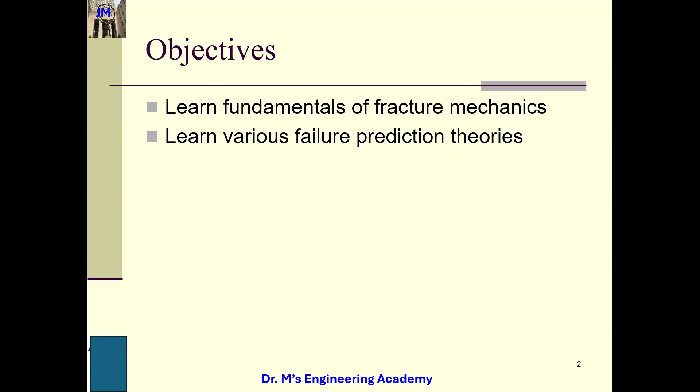So, introduction to fracture mechanics. Fracture mechanics is a very important branch of mechanics, and we are going to talk about it first because these are the fundamentals. We focus on linear elastic fracture mechanics, which analyzes crack growth during service. We're going to focus on LEFM, linear elastic fracture mechanics. That's the basics. We also have elastoplastic fracture mechanics, which is upper level.

LEFM assumes cracks can exist before service begins - for example, existing flaws in the structure, second phase inclusions, or defects - and attempts to model and predict the growth of cracks. We can predict under what conditions a crack initiates, and also under what conditions a crack propagates.

So the stress concentration approach is inadequate. What is stress concentration? We know this, right? Stress concentration means that if we have some defects, flaws, or cracks, at the edge of the cracks the stress will be much higher than the stress level of other areas. You still remember stress concentration?

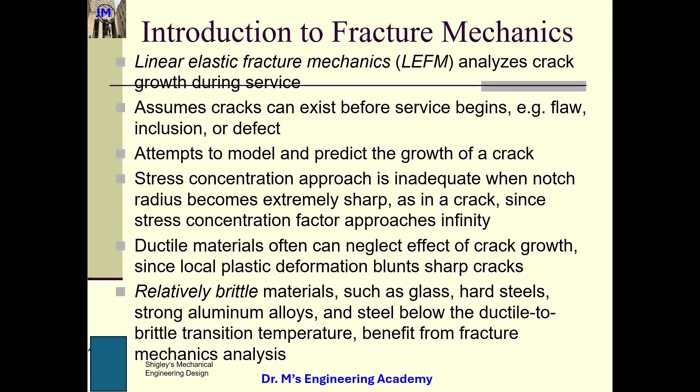So, quasi-static fracture. Though brittle fracture seems instantaneous, it actually takes time to feed the crack energy from the stress field and propagate the crack. So a static crack may be stable and not propagate. At some level of loading, it can render a crack unstable, causing it to propagate and fracture. So sometimes under certain loading conditions we can have a crack that is stable and will not propagate. However, if we change the loading condition, this crack can go all the way down until the material fully fractures.

So I told you guys, fracture cracking is a very effective way for the system to release energy. I told you, right? Whenever the energy is too much for the system, the most vulnerable points will have fracture, because there is a tendency for all systems to want to reach the minimum level of energy, to reach a state of equilibrium.

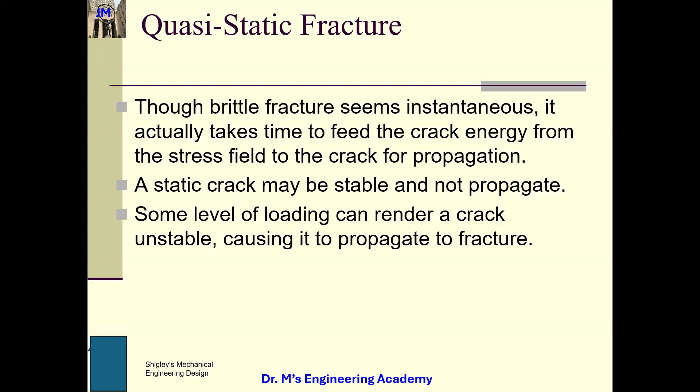So this is quasi-static fracture. What is quasi-static? We have learned static, right? And dynamic. What is quasi-static? Quasi-static means that the loading condition changes slowly, such that for all this time, a state of equilibrium can be reached.

Can you write this down? Quasi-static means that the loading condition is changing - it's not static anymore. The loading condition is changing, but it changes slowly, such that for each of these steps I can treat it as static. That means for each of these steps, equilibrium is reached. Right now guys, this is what quasi-static means.

So fracture mechanics. This was established by this genius Griffith in 1921, which is 100 years ago.

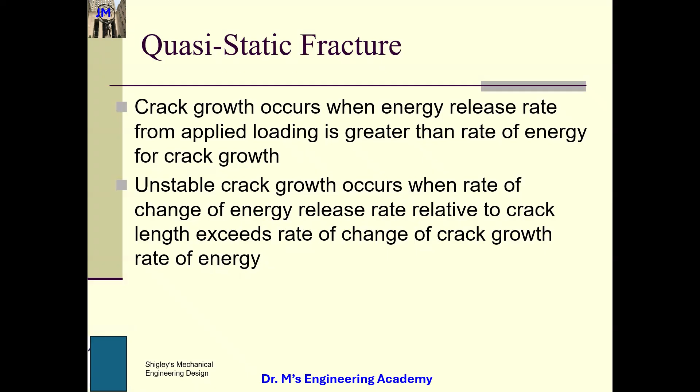And then we talk about the three modes of fracture. In the manufacturing processes class, I taught this one a little bit. So for fracture we have three modes.

The first one is opening, that's like an alligator's mouth opening. The second one is sliding - just think about when you drive your car on sand. If the traction is not big enough, the car tires are going to slide along the sand. So this is called sliding.

And the third one is tearing, which is out of the screen plane, going out. So these are the three different modes. The first mode is the most important one - it's the most commonly seen phenomenon.

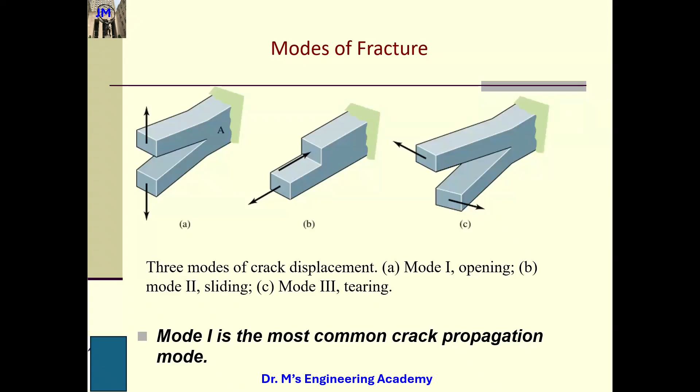Sigma x, sigma y, tau xy, and sigma z are different for this 2D case scenario. So sigma x, sigma y, and tau xy are related to the stress level you apply, and also the direction - you can see sigma theta, along with the crack length. So the sigma components are functions of the stress level, crack length, along with the location of the point of interest.

And regarding sigma z, we have 2 case scenarios. Plane stress means the plate is very, very thin, and plane strain means the plate is thick. So these are the equations.

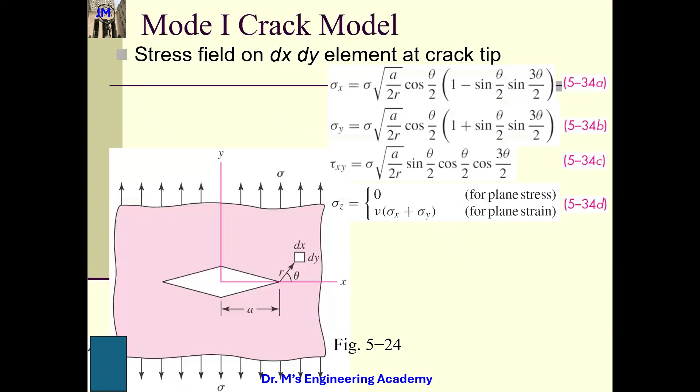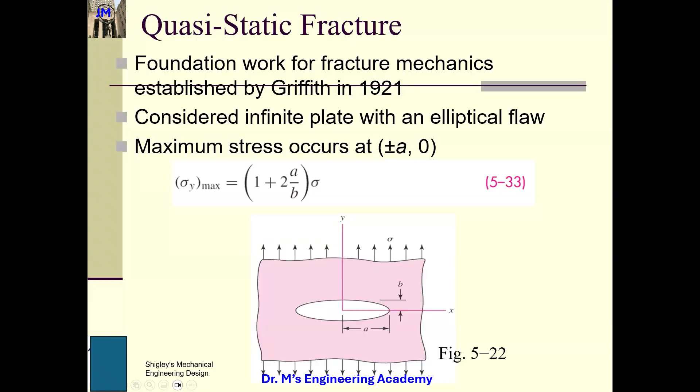However, for cracks, we have a stress intensity factor. So there are 2 different concepts. I might ask you in the exam to use your own language to tell me the difference between these two. Stress concentration factor is for a bigger hole, and stress intensity factor is for cracks. Specifically, stress intensity factor is for fracture mechanics.

Right now, stress intensity factor is for fracture mechanics. Stress concentration factor, which we call Kt, is for a bigger hole. Stress intensity factor, I specify as the stress intensity at the crack, K. This unit is very, very weird - if we use international units, megapascal square root meter. So Ki equals beta sigma nominal.

Sigma nominal is the load you apply, equals multiplied by square root pi times A - pi is a constant, A is the crack length. Can you write down this?

Write down, A is the crack length. The crack length is very, very interesting. If this is an edge crack, if this is an edge crack,

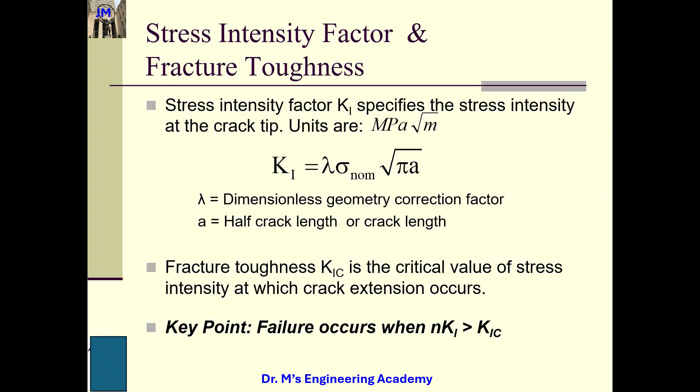So there is a geometry factor, the dimensionless geometry factor. It is dependent upon loading conditions and also dependent upon the geometry - geometry means how big is the crack and the geometry of your structure, you can see.

So for tension, I have tension. If this is width, so this is the central crack, this is thickness. So dependent upon the ratio of A to W, the lambda changes slightly, even though it's not very big, slightly. Be careful, okay? That means which lambda you should choose - you need to take a look at the geometry, and then come back to use this table to get the corresponding lambda. Once again, this is an empirical one.

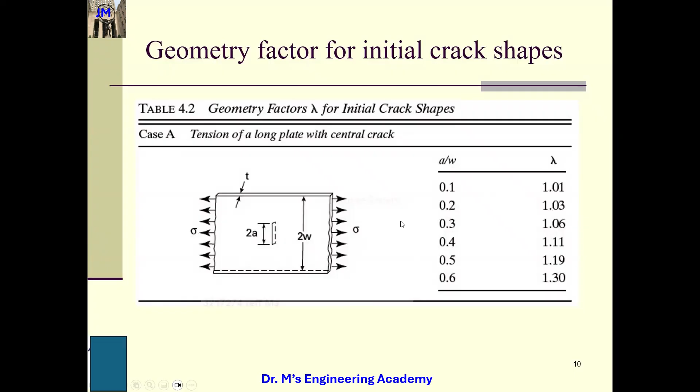Questions for these two slides?

Depending upon the crack size, the geometry of your material, the geometry of the structure, and also where the crack is—whether it's edge, central, or non-central, non-edge. So here, this is a non-central, non-edge crack. You can see this is not an edge, and also not central. This is off-central. We call it an off-central crack.

Longitudinal tension: solid curves are for crack tip A, and the dotted dashed curves are for crack tip B, because A and B are not symmetric anymore. Based on different tips, you are supposed to use different curves to get this number. The reason is that A and B are not symmetric about the centerline. How tough it is for A and how tough it is for B will be different, right?

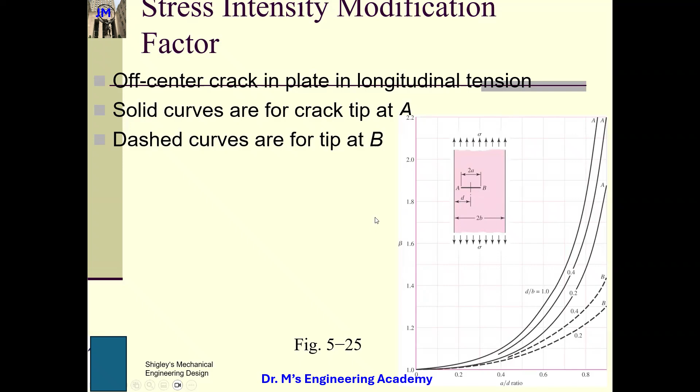This cylinder is loaded in axial tensile, having a radial crack of depth A extending completely around the circumference—a crack uniformly distributed along the cylinder.

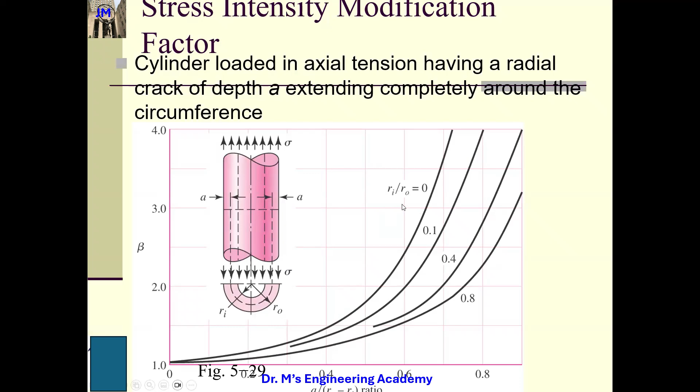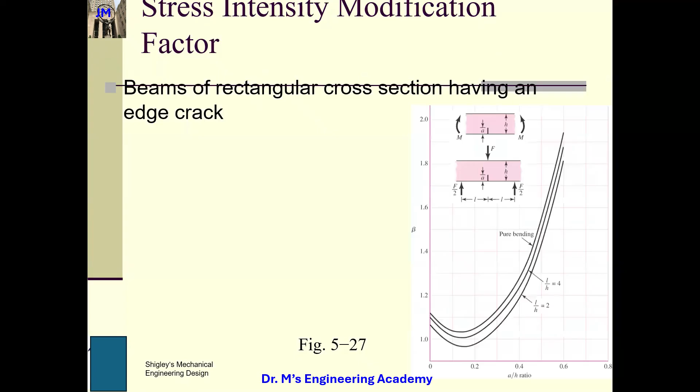So you have the lambda value, we can put beta—sorry guys, but this beta and lambda are the same thing, I forgot to tell you. These figures use beta, but here I'm using lambda; they are the same thing. Keep in mind, beta and lambda are the same because different authors use different notation—they both refer to the dimensionless geometry correction factor.

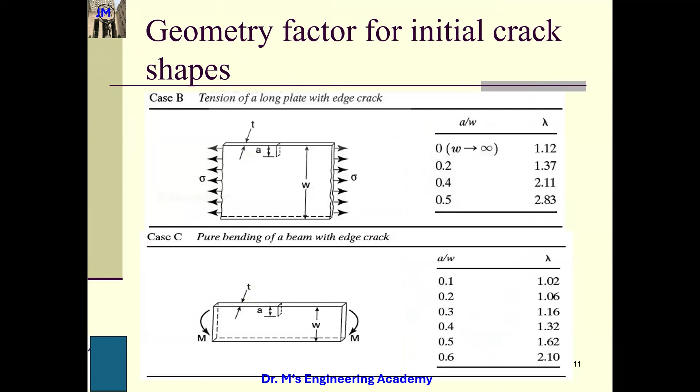This is a cylinder under internal pressure, having a radial crack in the longitudinal direction of depth A. Based on the ratio Ri and Ro, you have different beta.

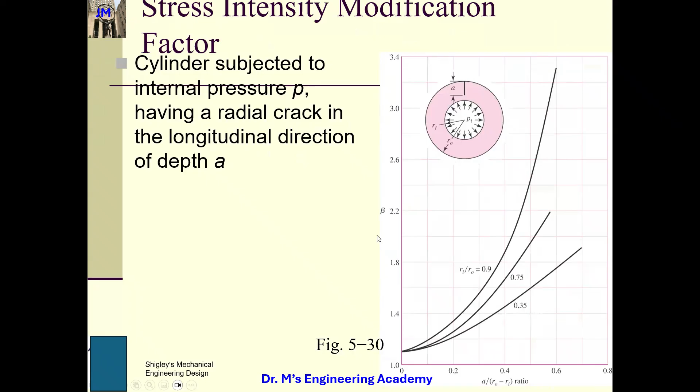Now, yield strength and fracture toughness. Fracture toughness is the indicator of how difficult it is to fracture a material—that means the ductility. The strength and the fracture toughness are always inversely related: high strength and low fracture toughness, or low strength and high fracture toughness. Fracture toughness is another indicator of ductility.

The stronger your material is, the lower the fracture toughness.

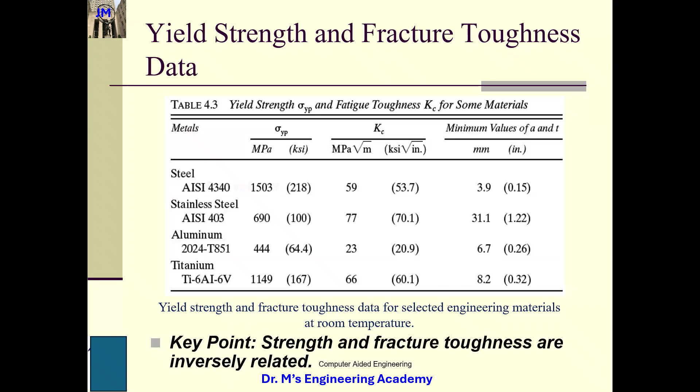These are factors affecting KIC, the material parameter: strain rate—if you increase the strain rate, KIC decreases. Temperature—if you lower the temperature, KIC decreases. Yield strength increases, KIC decreases, because they are inversely related. And KIC increases with ductility; KIC and ductility are talking about the same thing.

You select a material with a high KIC. Keep in mind, if it has a high KIC, that relates to strength, and you need to consider the strength as well.

Questions so far? No questions yet? You can understand fracture mechanics very well—you're very, very smart, much smarter than I was.

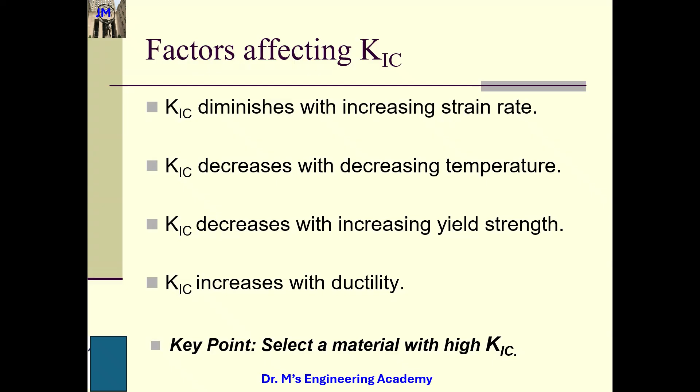Okay, then we talk about this equation and how to predict failure. We use two commonly used equations: one is called MSST, and one is called DET. MSST is also referred to as the Tresca criteria.

And the DET refers to von Mises criteria. Von Mises and Tresca, they are two genii, so they have developed this one for us.

You can see for the MSST, pay attention to what I say. This problem will appear in our exam. MSST uses sigma 1 and sigma 3, that is the highest principal stress minus the lowest principal stress. If the difference between these two is equal to the yield strength divided by NS, that's a critical point. So if this equation holds, you need to be very, very careful.

So the second one, the DET, uses sigma 1, sigma 2, sigma 3, the three principal stress values. Some students ask, what if we do not have the principal stress at the very beginning? Then for any common stress values, you should use this equation with sigma x, sigma y, sigma z, and tau xy, tau yz, tau zx.

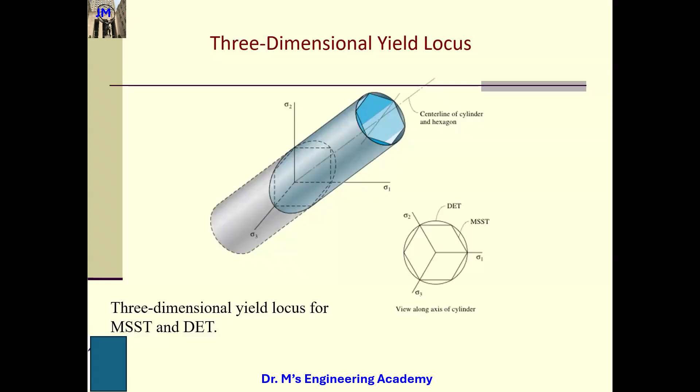Then for the MSST, how to solve the problem using MSST - this is for DET. For MSST, we use sigma 1 and sigma 3.

Do you guys still remember how I told you to draw the Mohr circle? I draw a Mohr circle, talking about 2D now. Draw a Mohr circle, the center, this is O, and this is C. OC equals half of sigma x plus sigma y.

You guys still remember? Then I have this point, I select the point - this point is sigma x and minus tau xy. Without loss of generality, I just put this point. You still remember, guys? Because I'm going to ask you to use Mohr circles, use MSST to solve the problem. So here, this is my radius.

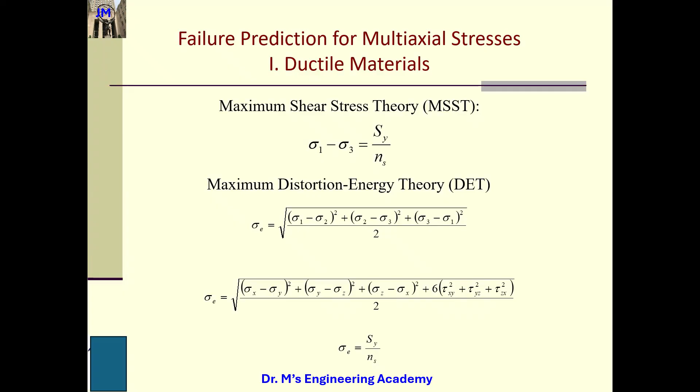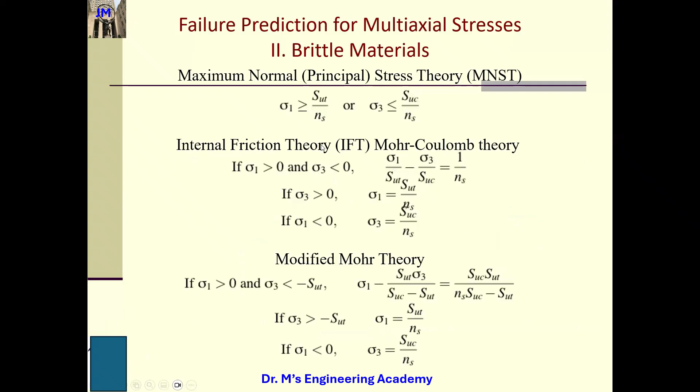So here for the MSST, for the biaxial stress state. For the brittle material, and here, I will not test your understanding. This maximum normal stress theory for brittle material, we talk about this example. This example is a very, very interesting one. You can see I apply a load here, in the range. Can somebody tell me which point is the most vulnerable point?

And to fail - this point, right? Why? Because this F, if we look at the impact of this F, we can just move this guy from here to here, right? So here we will have a torque. This will be bending moment. We will torque this way. This is bending, this is the torque, and then we move this guy to here.

So this guy will bend this. This is a whole beam and this way. So that's the reason for point A - it has the highest twisting moment and also the highest bending moment.

You can see the sigma x is the result of bending moment, M over IC. How to calculate the bending moment - the force multiplied by the distance from here to here, which equals F multiplied by 12 plus 2, so 14F. So this is the bending moment.

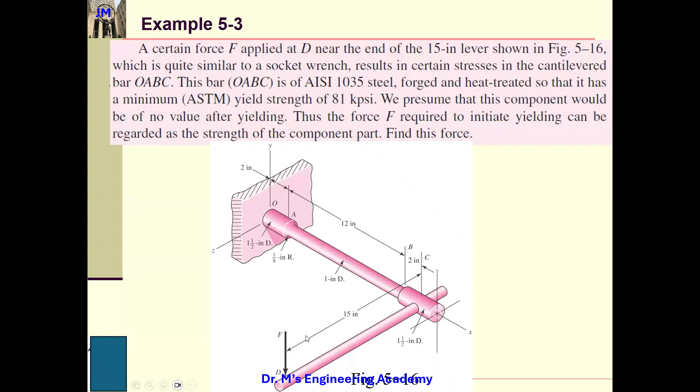And also, because this guy is applied here, we have a torque. This torque equals F multiplied by this effective arm, F multiplied by 15. This is the torque. So we have sigma x because of the bending moment, and tau zx because of the twisting moment.

We get the sigma x, tau xz, and we do not have any other stress components, and then we can use this equation. You understand, guys? And we use this equation, you can see, and then we solve this problem.

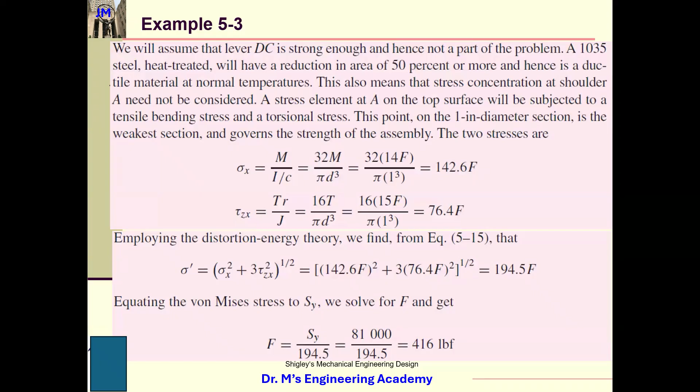And so for this is MSST. You can see this equation, and we calculate the R - tau maximum equals the R, right? And then this R, we just assume n equals 1, and then you can use this equation to calculate what F it will have.

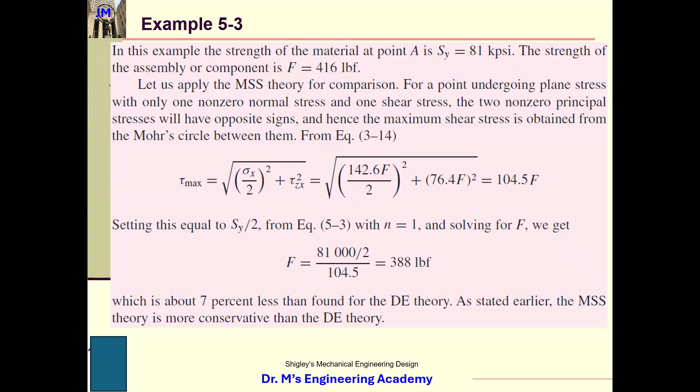Oh yes, I'm going to stop here. So this problem, not necessarily this problem, but we are going to use MSST and DET to solve the problem. We will have 3 problems.